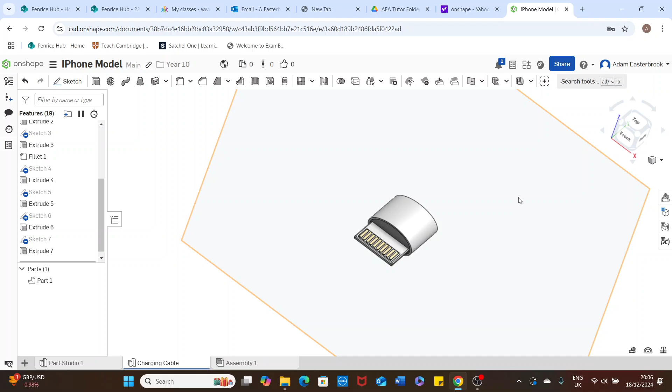Pause it, slow it down, rewind it, and follow along, and you should hopefully not get too lost. Here we go. So let's spin around. I want to have a look at the back of this USB. We're going to be sketching onto that face there.

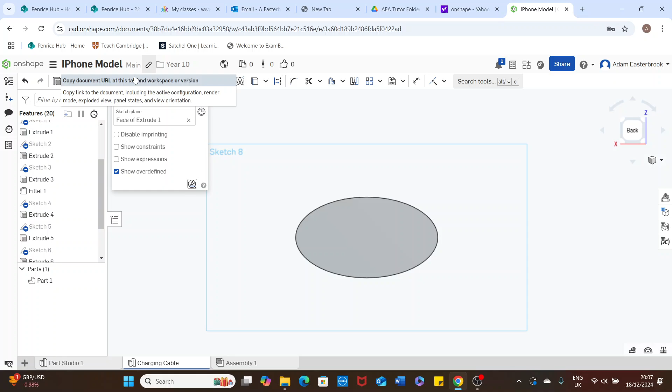I'm going to click back and zoom in so it can be nice and precise. I'm going to sketch on that face, and this is actually going to be a circle, looking at the one I'm holding here. Center point circle - wait till you find that orange square, click, drag your mouse up, and this one doesn't go all the way to the top.

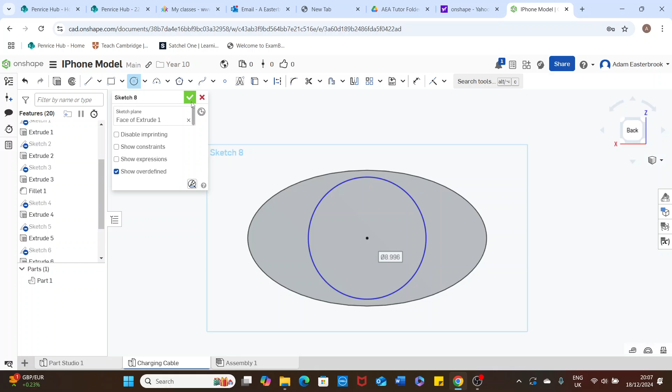I reckon it goes to about there, so try and get your sketch to look like that. I'm not going to dimension it. I don't have a set of calipers here to measure the diameter of this part of the charger, but that looks good enough to me. Green tick, so I've sketched onto the back there.

So extrude. It's just lagging slightly. Why is it not letting me choose that? Let's try again.

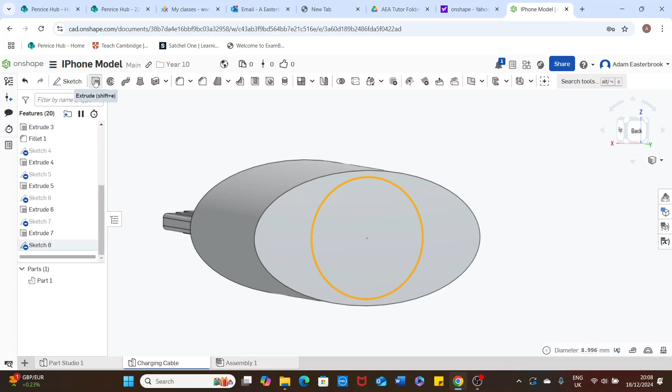Sketch 8, extrude, and this one's going to be extruded to 15 millimeters. Green tick. I don't know why it's changed the colour. I don't know, that's fine.

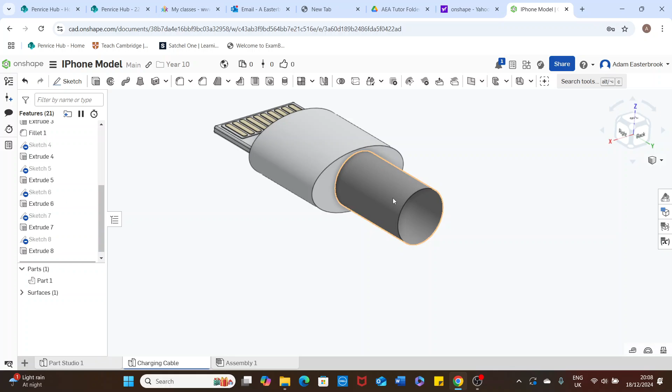Just leave it as is for a minute, we can come on to those details in a bit. So that's pretty much the head completed. We now need to do the cable.

So this is where we're going to use a new tool that we've not really looked at before. It's at the top toolbar here. It's called a sweep, and it's similar to an extrude, but it's also quite different in many other ways.

So an extrude, if I was to extrude this, it would just be a linear shape - it would be cylindrical and in a straight line. Well, a cable doesn't look like that. It actually sort of bends and twists, and we want our virtual model to be as realistic as we possibly can. So extrude isn't going to work for us here.

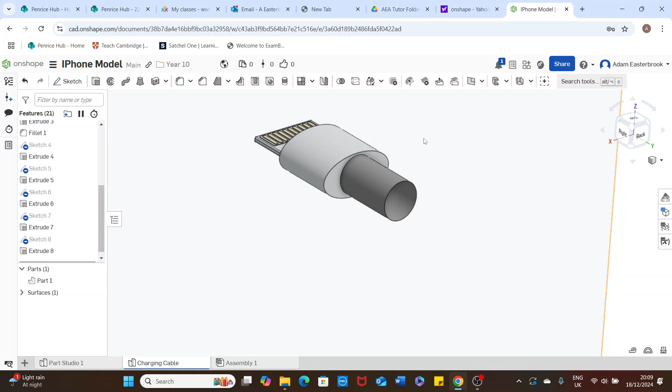We're going to use the sweep tool. Easiest way to do this is go to your isometric view.

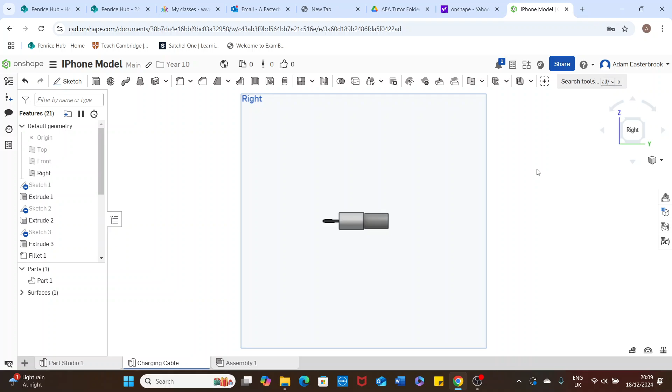We're going to hide the front plane because we're not going to use it for a minute, so it keeps it tidy. And we're actually going to unhide the right plane, and click on our right side of our viewing cube. So I'm looking at my USB charging head from the side.

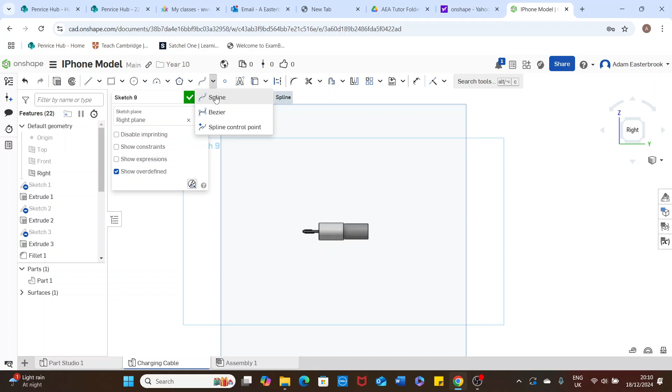We're going to sketch on the right plane. So again, as always, you've got two choices - you can click on the right plane there, or if you prefer clicking there, you can click there. And we're going to choose a spline, so we can create this curvy or wavy line.

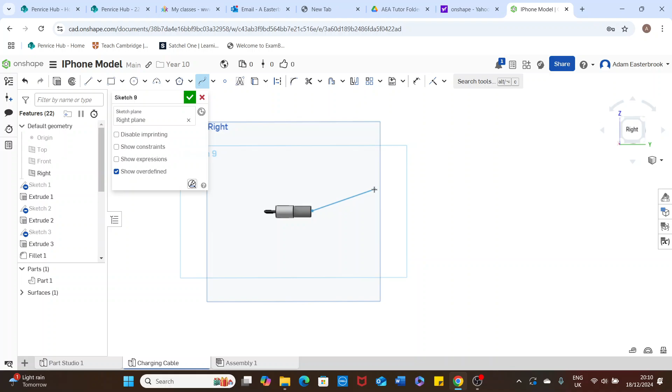So I'm going to try and get it as close as I can to the end. Doesn't have to - give yourself a little bit of a gap. So I'm going to zoom out a little bit so you can see. I'm just going to take my charger in a bit of a curve, really.

There. Once I'm happy, I can either double click at the end, or right click and confirm spline, and there is my squiggly line. So I'm going to green tick that.

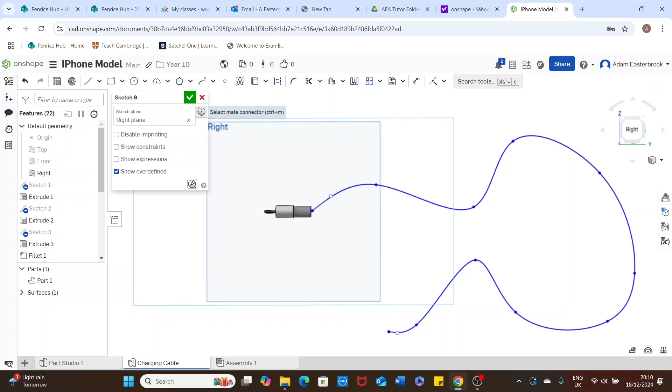Now we need to make this into - so at the moment it's a line, it's a sketch. We need to make it into a 3D object, and we're actually going to use a sweep tool.

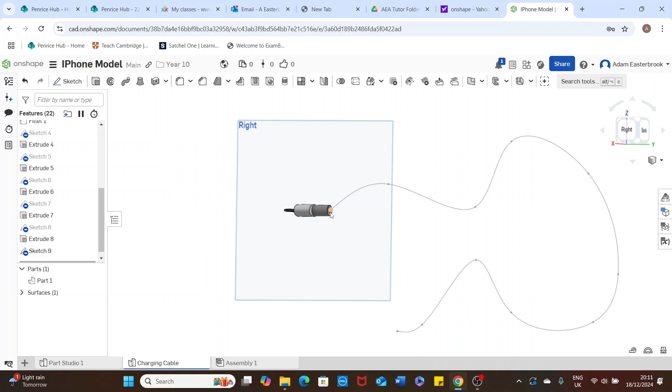We need to set the diameter of this wire, and we're going to do that by sketching a little circle on the back of here. So I'm going to hide the right plane because we don't need it so much anymore. I'm going to zoom in, and I'm looking at this back part here.

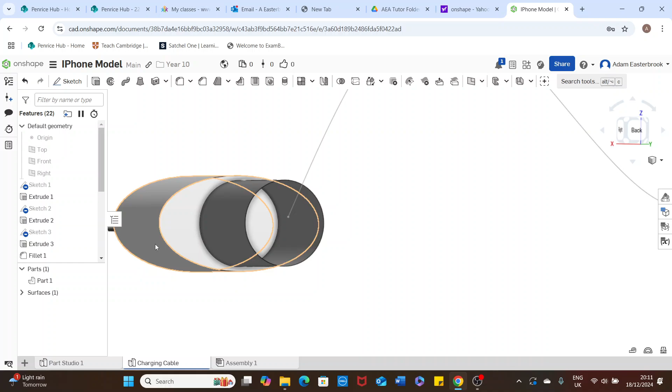Something's happened with my extrude there. Let's go fix that. Extrude. Oh, you can see what went wrong there - it happens sometimes, it's a common thing that goes wrong. So I've clicked surface - I want it to be a solid.

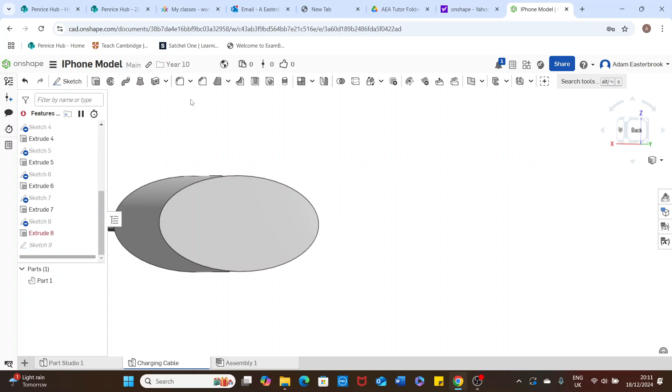Okay, oops, got that wrong. No, what's going on there? Let's delete it and go do that again.

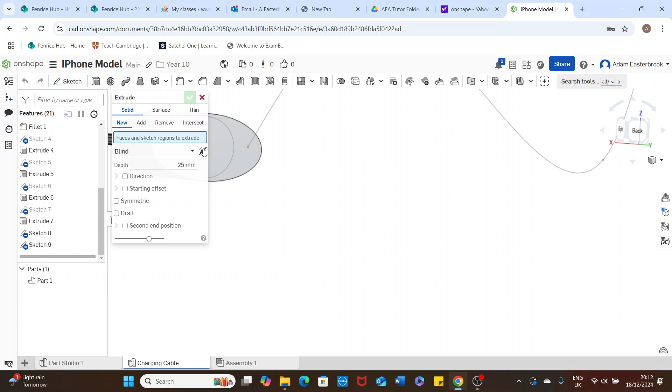So click extrude, screw that on there, and we said it's going to be 25 millimeters. Solid, add 2. There we go. Don't know why I did that.

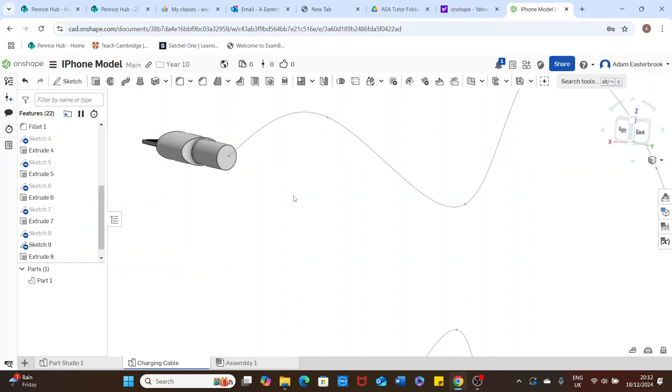So, back to our sweep. So I've sketched this squiggly line. I'm now going to sketch, or we're now going to set the diameter - so how thick this cable is going to be.

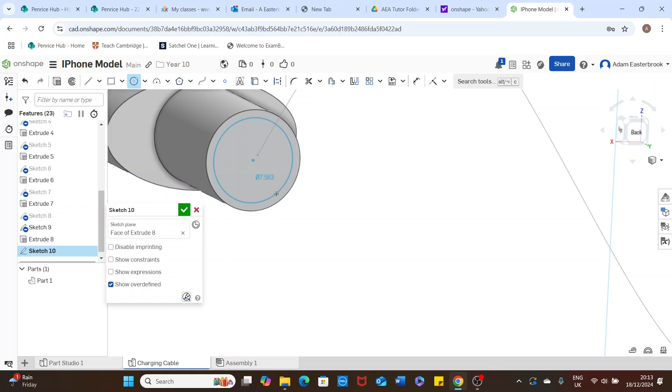So sketch - I'm going to sketch onto that face there. Center point circle, find a center. And it's a little bit thinner, a little bit smaller than that larger circle - so a little circle inside the outside of the back piece. Green tick, there we go.

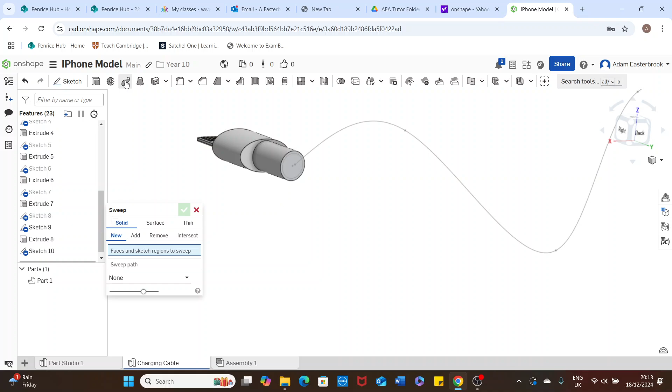So what I'm going to do now, this is where the sweep tool comes into its own. I'm going to click on sweep. Let's have a look at the instruction box. Similar to an extrude, but what it's saying is I want it to be solid, I want it to be a new sweep - it's saying what faces or what sketches do I want to extrude?

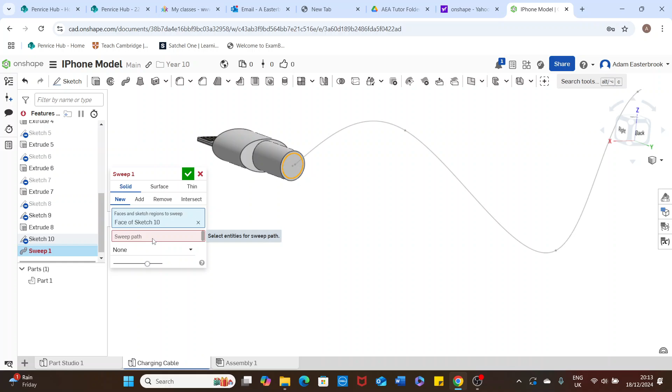Well, I want to extrude that inner circle, so I'm going to click on that. This instruction's red, so I need to click on it to turn it blue. And it's saying, well, what path do you want this circle to follow? Well, we want it to follow that sketch that we've just done.

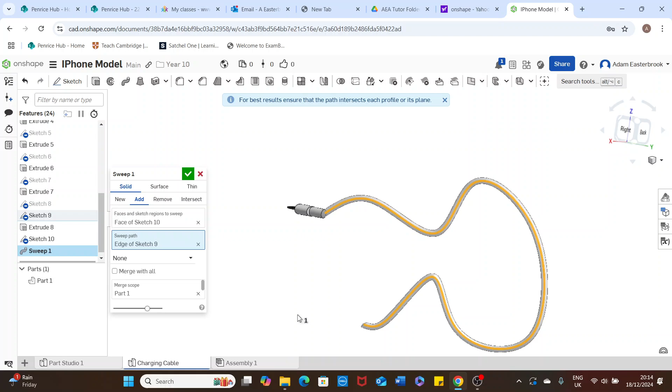So if I now zoom out, you can see what it's done. I've sketched the circle shape - that's the sketch that I want to sweep. And the sweep path is that squiggly line that I have sketched. Right, and I'm going to green tick that.

So there we go, there is my cable. It looks more realistic than if I had just stuck with an extrude - it'd been a straight line, it wouldn't be realistic.

Now I've actually got something that resembles more of a realistic cable. I'm going to pause it there, and in the next video we're going to have a go at putting the USB-A head on the end of our cable, and we should be done.